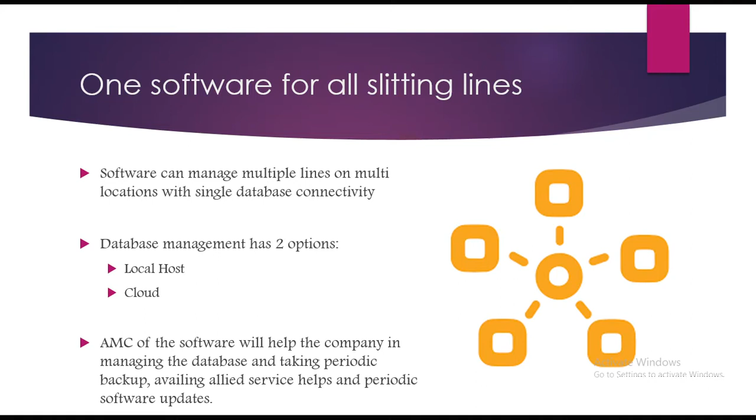So I'll come to the first point of this software that we elaborated earlier: one software for all the slitting lines. As I told, we can have 2 or 3 different geographical locations of the plant, and we can manage them through a single window. That is a very good and versatile function of this software, and nobody in the world is offering that type of flexibility.

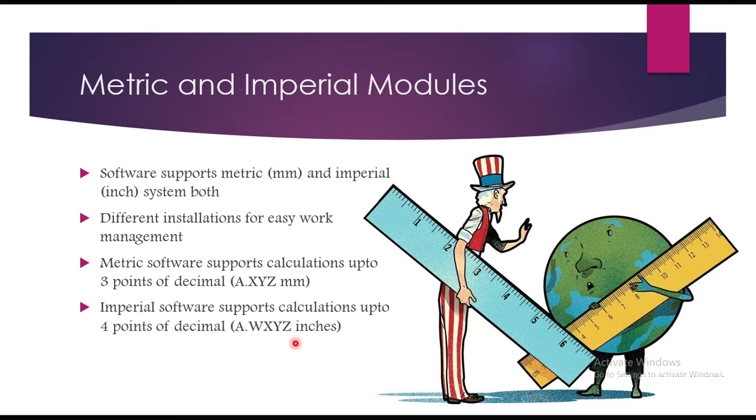So this single software works on both metric and inches. As I told, the metric software works to 3 decimal places maximum, and for inches it supports up to 4 decimal places. So we can manage multiple slitting lines, either metric or inches, through this software.

Other than this, the software does not only focus on the slitter; it also focuses on the overarm separator. So we can do both overarm separator management and slitter management. Some slitting lines have removable heads, some have injectable heads, some have turret heads, so it can manage different types of heads. We can print reports, reverse, forward, plenty of things demanded by the end users. So we can offer seamless, infinite variability to the customer as per their requirements.

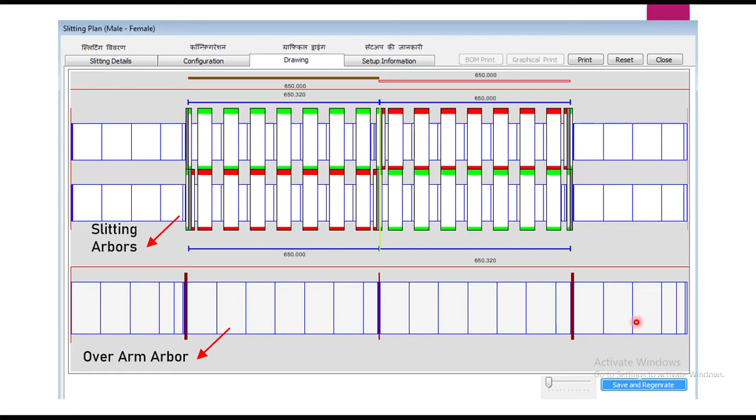The white ones are the spacers, metallic spacers. These colored spacers are the rubber bonded spacers. So these two are the slitting line arbors, top arbor and bottom arbor. And similarly, this on the bottom side is the overarm separator arbor. So it is showing the setup in the form of a drawing.

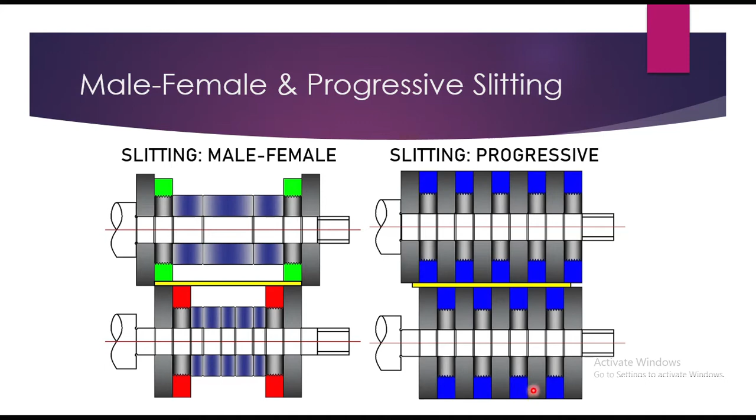This is a practical example of a male and female slitter. If you see, the bottom spacers are there, bottom arbor, top arbor. We are doing this slitting, and this is a pre-assembled arbor which is used in progressive slitting, so that can also be managed through this software.

Many of the lines work on shims, plastic shims. So we can use this software to manage plastic shims, while some lines are shimless and use fraction metallic spacers. So we can put fraction metallic spacers into the inventory. We can allow the user to input plastic shims, and as I told, there is no limitation on the software when we use it in the workshop.

So it is very versatile, and it gives absolute flexibility to the user to use the software for any sort of line. So repeatedly I am telling you that it is not just a software to manage shimless tools; lines which are using shims we can also manage through this software. Yes, we should admit that the software has plenty of functions and features specifically targeting shimless tooling, because when we developed this software earlier, we were targeting only shimless, so we were calling it shimless tooling management software.

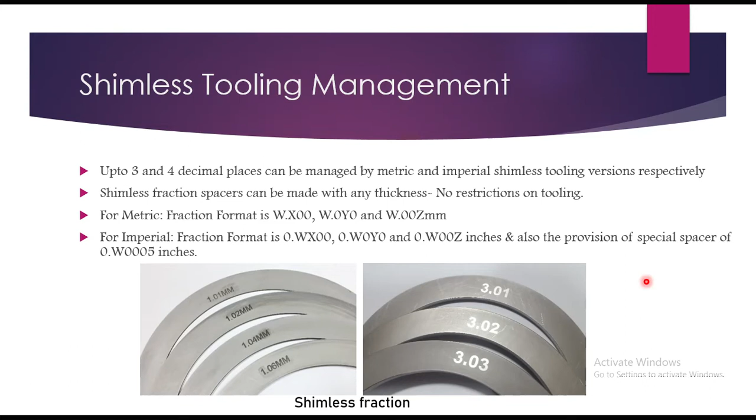And if you want to bring a systematic culture into your company, the software helps the management to do so.

So as I was telling you, in this software, when we set up any machine, it allows us to select whether that machine works shimless or with shims, and what decimal system we are working on, whether we are using the slitting line for first decimal, second decimal, or third decimal. So up to whatever accuracy the line is built, to that accuracy we can use the software.

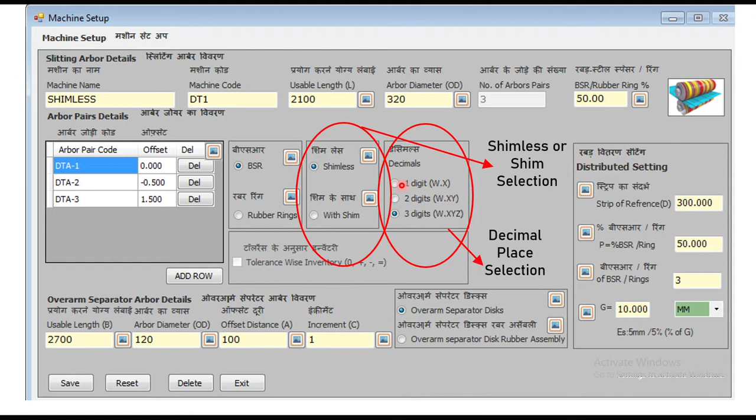When we select any sort of decimal system, it allows us to input the inventory of that particular line. For that particular line, we can input the inventory of the metallic spacers, like all the tools that we will be using for slitting. So all the tools can be input through the software.

This particular job we do when we set up the software for the customer: we take all the inventory from the customer, and we do this data entry into the software, because this is not a day-to-day job they need to do. So when the software is installed for the user, they just do the setups. They make the setup, take the printout, and do the slitting. So they don't need to do any of this inventory filling of forms and other things.

But these are the provisions that are there. We can alter if there is any damage in any size, or there is addition or subtraction of the actual quantity; we can come here onto these screens and do the alterations. So, as I told, not only the shimless, we can do the plastic shims as well. So these plastic shims also we can input into the software.

When we use plastic shims, why it is not desirable to have them in the setup is because the compressibility of the plastic shims is a major issue. When we have these plastic shims in the slitting line between the spacers, and when we tighten the lock nuts, or hydraulic lock nuts, or grease lock nuts, or hydraulic locking, any of the locking systems, when we apply this clamping force,

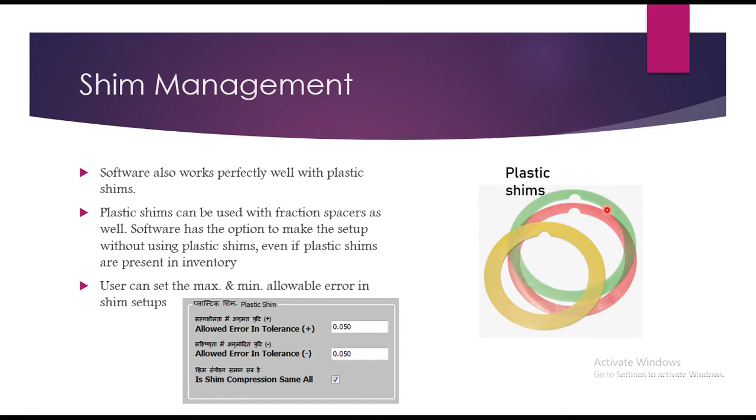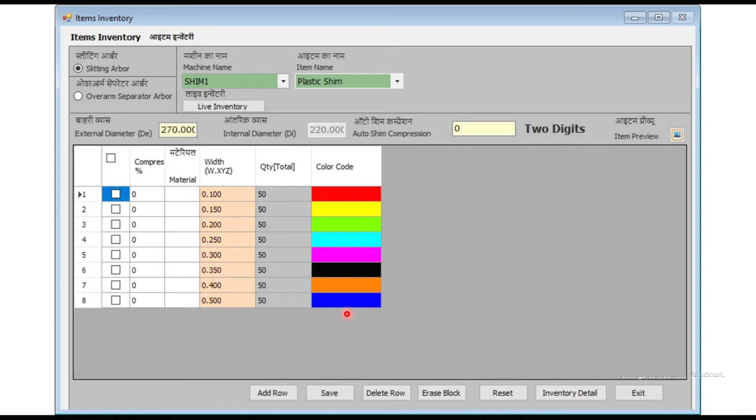Of course, we need a color printout of the report so that the color can appear, but on the soft copy it will be appearing if you don't have a color printout on the line.

For plastic shims, when we developed this software and did some demos, some customers asked why it uses plastic all the time, if I have a machine with metal spacers as well as plastic shims. Earlier, my software was trying to make every setup using metal and plastic shims all the time. But there is plenty of possibility that I have some metallic fraction spacers with which, for example, I can make 80% of the setup, and for the remaining 20% I want to use plastic shims.

So one line I want to manage with plastic shims, but 80% of my jobs or setups I want to do through metallic spacers only. So we have introduced this check button. If we check this particular button, only then plastic shims will be used in the particular setup. If we uncheck this option, the setup will not use plastic shims for the calculation; it will do the calculation with metallic spacers.

So even if plastic shims are available in the inventory, it tries to make the setup with metallic spacers, and by doing so we reduce the possibility of error during the setup. So this is also one unique feature.

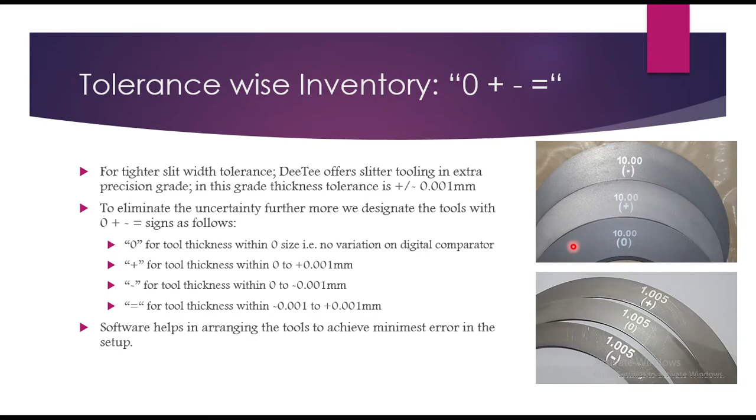But if we manufacture this type of tooling for any customer who wants to use this function, we can supply the tools with these marks, and our software will have this provision; we will enable the tolerance-wise inventory function. For example, for knives, we can input the 0 tolerance quantity, the plus tolerance quantity and the minus tolerance quantity in the software.

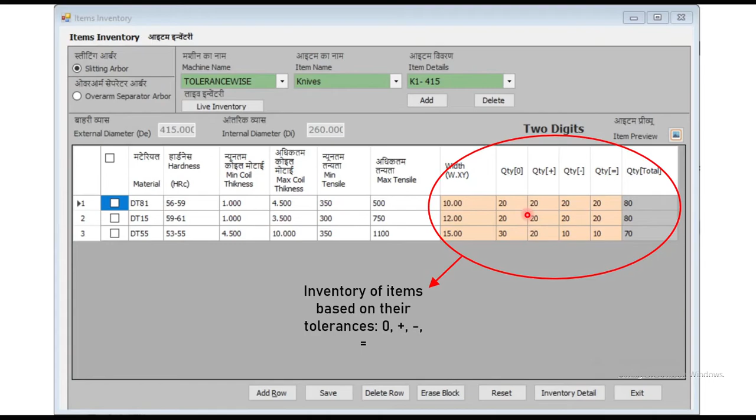So like that, when we are doing it at the end of the top and bottom arbor, it will do the sum. How many plus tolerance jobs I have used: 20, minus 20, 0 61, equal tolerance. How many pieces I have used: 3. So the cumulative tolerance, cumulative error, because of the thickness of the job, is only plus 3 microns, and here in this case on the bottom arbor it is plus 10 microns.

But if we don't mark plus, minus or 0, we will be using the spacers randomly and the tolerance will not be known. So this particular requirement we can fulfill, and this particular function can be used particularly by the CR slitters who are really looking for close tolerances.

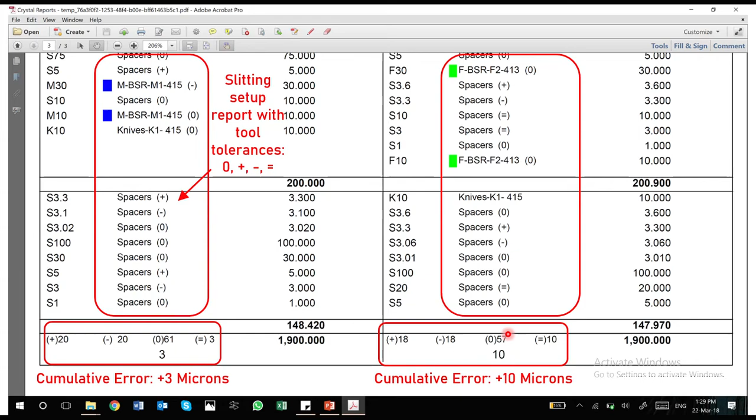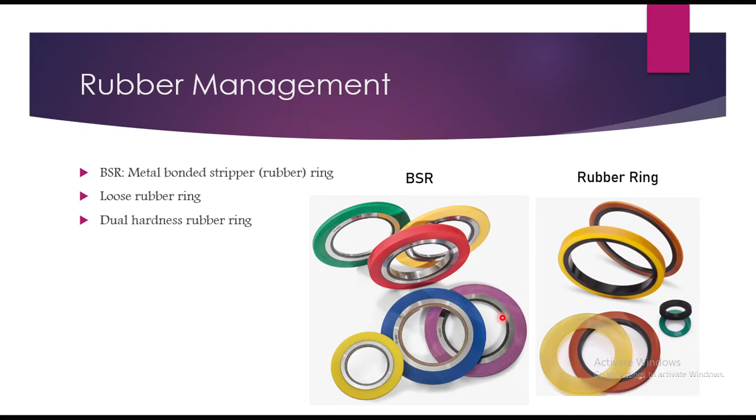Okay. Now, regarding rubber management, our software gives very good flexibility to the user whether they want to use a rubberized spacer, metal bonded rubberized spacer, loose rubber rings, or dual hardness rubber rings. So any requirement of the customer can be managed through this software. When we make a setup, we can select for any particular side whether we want to use rubber bonded spacers or rubber rings.

Okay. So when we set up this software, in the inventory screen we can define different types of colors and diameters of the jobs. Using the software we can define in the inventory if the customer has certain sets of male and female rubber bonded spacers or rubber rings. So we can define female rubber bonded spacers, like here male rubber rings. So any of the inventory we can manage through the software. We'll see it a little later on the actual software as well.

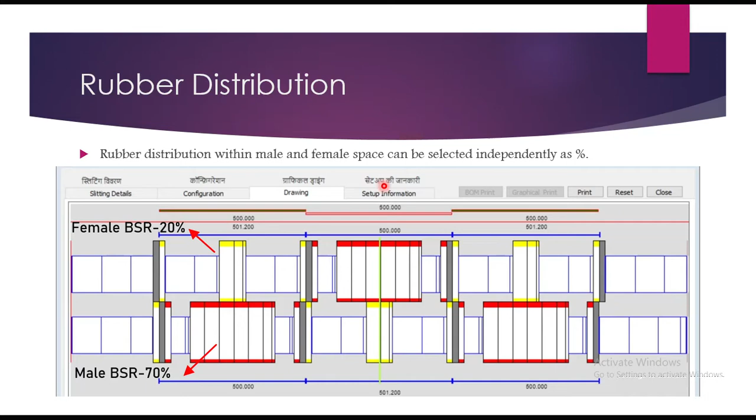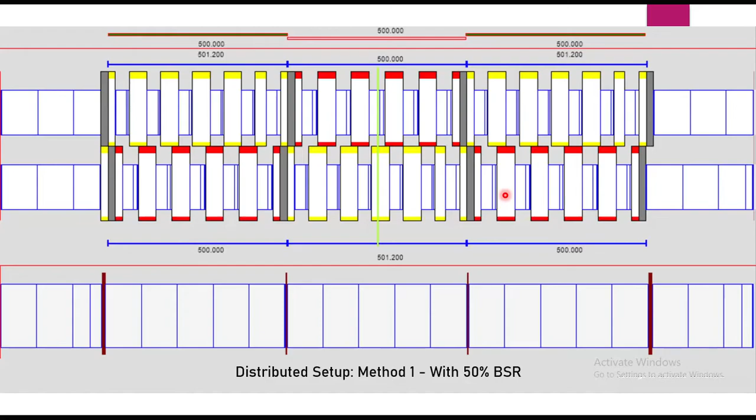Rubber rings had one hurdle when managing through the software. When we use 20 rubber bonded spacers, they occupy 20 of space on the arbor, but for the rubber ring it is not the case. A rubber ring does not occupy any space on the arbor while filling the arbor, because rubber rings are mounted over the spacer metal OD. So it was a little difficult for us to do the management using this software. So we have introduced this ring mapping.

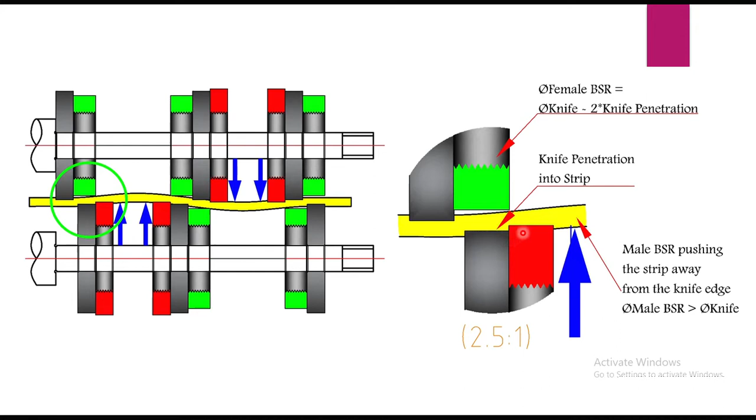This allows us not to have a mark on the cut strip equal to this thickness. For example, if it is 15 on the slit, if we see exactly at 15 there is one line that we get on the slit, this strip width - that is called slit-in. This can be avoided by proper use of male rubber bonded spacers, as shown here, generating this gap.

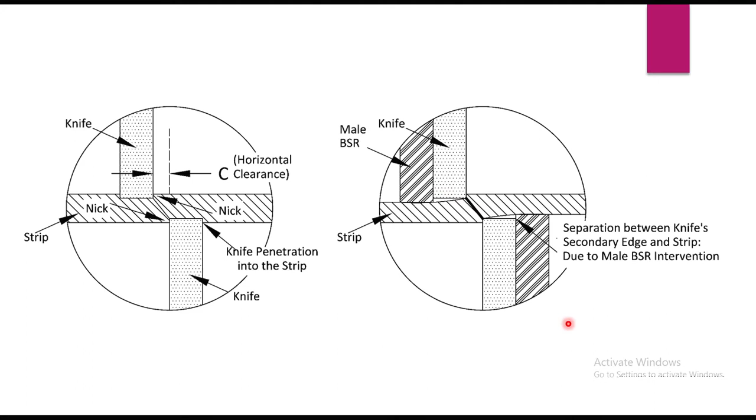So these types of things also can be done using our software, which covers rubber bonded spacer practices that customers have. There are plenty of scientific ways of doing this calculation, how much should be the diameter of the rubberized spacers, and those things also we can do using this software.

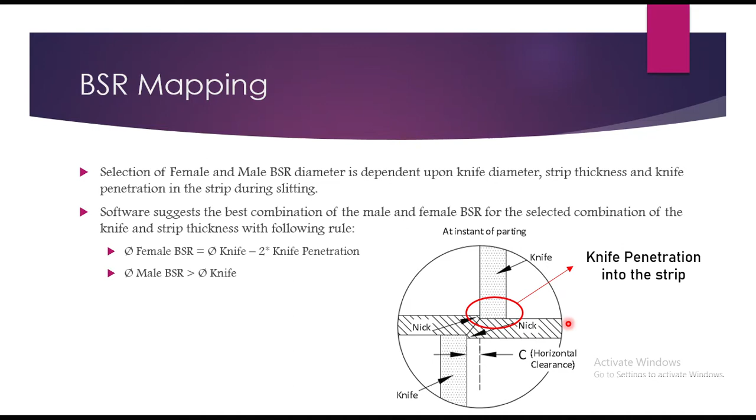There is one important part, this BSR mapping is there. We will show this part when we will be doing through the actual software, which will be a little clearer to you at that time. I'll skip this session a little bit.

There is one more important point which is a very key function for selling this software to the customer: application mapping for the knife. As explained in the previous session, one knife cannot cut all materials. When a customer asks us to design a knife, we design it for its application, and that application is not marked on the knife. So the end user will not know which particular knife is designed for which application. It is on paper, but all the technical detail cannot be written on the knife face.

So what is the scenario? Okay, I'll try to be a little slow on the pace as I'm getting constant reminders. Okay, we are talking about this application mapping for the knife.

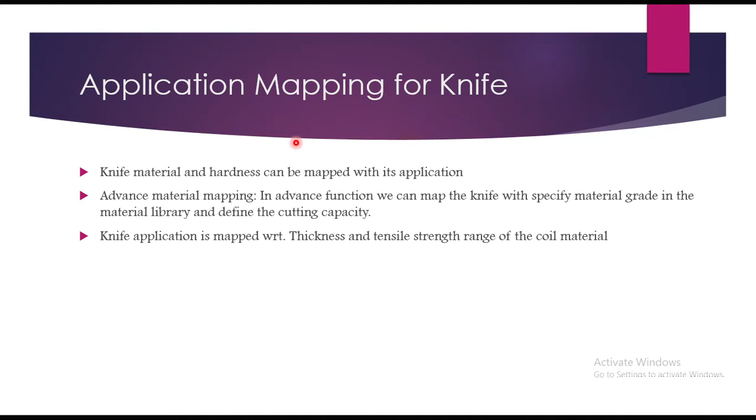But if you want to map the application into the software, whatever the cutting capacity is, we can define it into the software. So if it is already defined, and you are dependent on this software to make the setup, then if we use a 10mm knife that is designed for 1mm to 4mm, and try to select it for slitting 5mm, the software will not allow it, because we will be mapping the particular knife to its application.

So any mishandling of the job by using a knife for an inappropriate application can be avoided using this software. This is a degree of security we can sell to the user: this type of flexibility means failures due to application mismatch during day-to-day usage can be avoided. But of course you need to be dependent on the software to do it, because if they make the setup without using the software, nobody can help. So if the customer is dependent on this software to make the setup, the software will not allow them to use the knife other than for its intended application.

I am skipping this particular alternate knife selection function a bit. This is also one function: if any knife gets exhausted during setup, meaning its quantity is not sufficient, the software intelligently selects alternate knives as well, based on its application mapping, without sacrificing cut quality. So this alternate knife selection can also be used in the software.

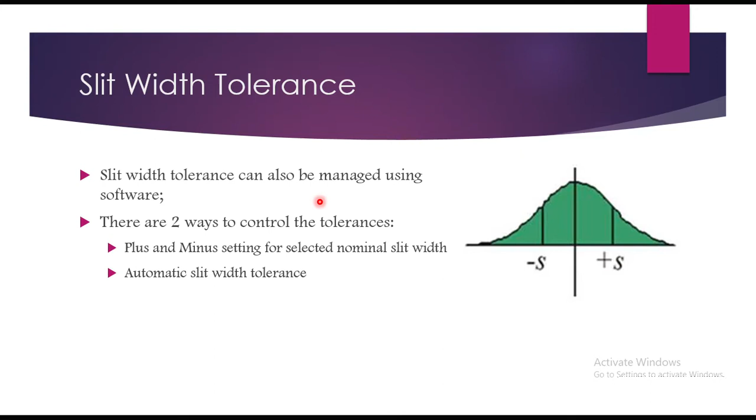One more important function of this software is it allows the user to control the slit width tolerance as well. There are two versions or calculation levels for slit width tolerance calculation. One of the very common ways of controlling the tolerance of the slit width is the plus and minus setting.

In the software, the first level calculation allows this plus and minus setting, which I will show in the actual software. If we select the plus setting, whatever slit we generate, its tolerance will always be positive, never negative. If we use the minus setting, the tolerance of the slit we cut will never be plus, it will always be minus. So this is the very basic setup that we can do.

There is one advanced slit width tolerance feature also we can do. For example, if we want to cut 200 mm width with 8 number of slits, this is a very impractical example, but just to show you the versatility of the software. For each slit I want different tolerance: 0.1 to 0.5, minus 0.1 to 0.2, 0 to 0.3, 0 to 0.25, 0 to 0.2, minus 0.3 to 0, minus 0.25 to 0, minus 0.2 to 0. This is actually filled by the user. So I want to have 200 mm width, but I also want this much tolerance on the width.

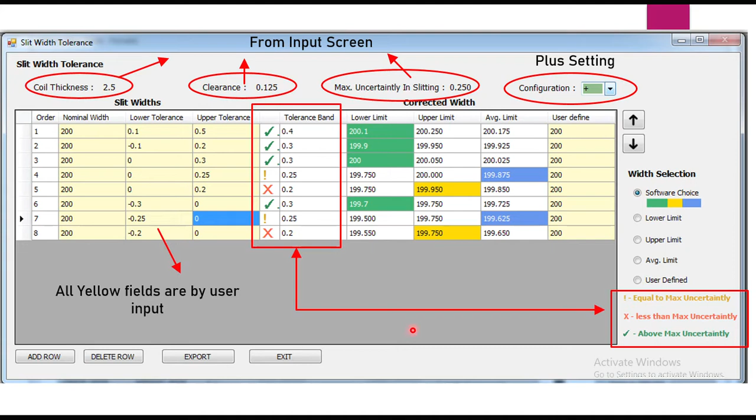So what my software does, it calculates what should be the actual width. Earlier, if I don't use slit width tolerance, I would have used 200 eight times, but I have used that tolerance window, so then it intelligently selected my nominal size. I am not saying it is bang on perfect, but it is calculating based on some mathematical logic how you need to select your nominal size to achieve that particular tolerance. So software also assists us, it is not just input and output, it also tells you many things.

By using this software, we can do regrinding management of the tools as well. This is also a very good feature, not offered by any of the competitor software. So this regrinding management also we can do. We can actually...

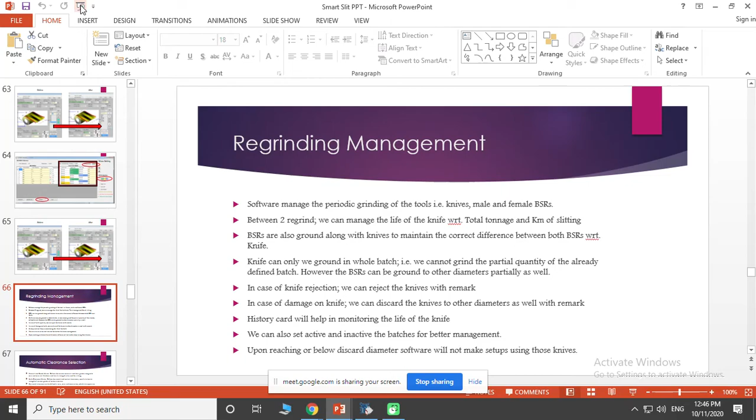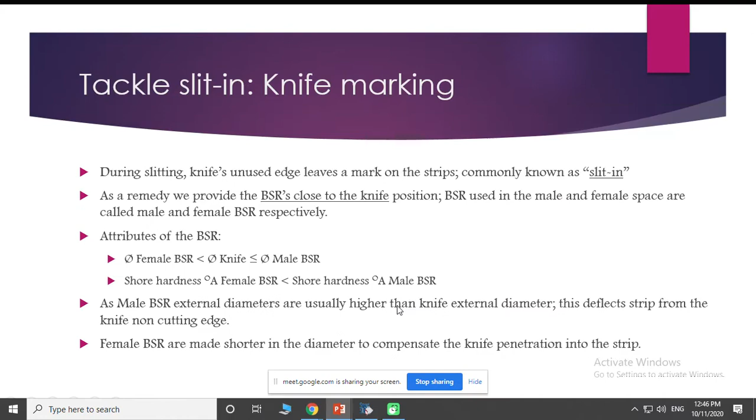Hello, just a minute. Hello, Prabhaji. Why is it not coming for so long? Hello, hello, is it audible sir? Just a minute. Sir, am I audible? Okay, okay, let me present the screen one more time. Okay, Prabhat sir, can you let me know from where I have... just a minute. I think I was on regrinding. Okay, I hope I have covered the slit width tolerance. It was covered. Okay.

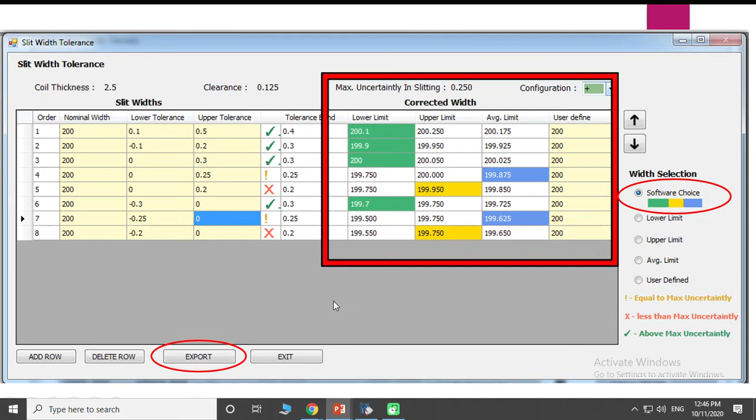So this particular software also, when customer wants to use dynamic tolerances for various strip widths, that can also be tackled through software, but it is not 100% correct, because nobody can predict 100% what tolerance the slit will come out to after slitting. It is not very easy to predict, but I could guarantee it can give you a very fair idea up to what level you can achieve. Software doesn't tell you that you can 100% achieve that tolerance. Theoretically, when it calculates the possibility, it calculates whether you are able to generate that tolerance or not.

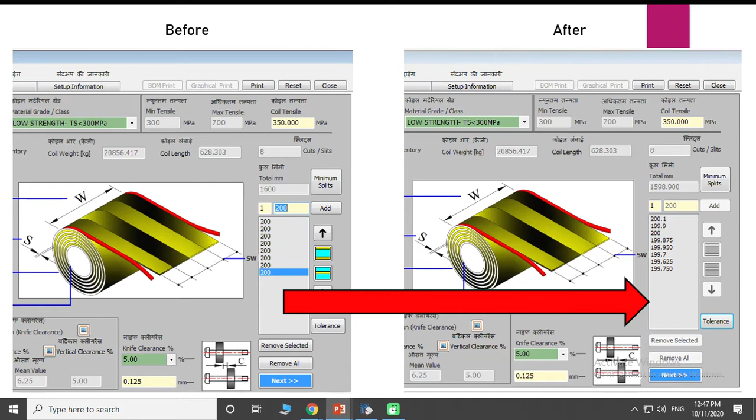So plenty of things are there, but scientifically we can have that initial information regarding how to do it. Now, one of the very important parts of this software is regrinding management. No software of the competitors is offering this regrinding management. When the knife gets blunt, we send it for regrinding, and after regrinding we get a new diameter. So whatever diameter reduction we have, for example 1 mm diameter has been ground, we calculate with the previous diameter how much tonnage or how much kilometer of slitting we have done. This software generates a history card for the complete life cycle of the knife, and tells the user how much per grinding, how much tonnage or kilometer they are slitting.

That is also a very good indicator. All slitter users have the practice to calculate this tonnage or kilometers, but this is the one software which is actually doing it automatically, of course you need to do the regrinding management through the software only, then it will tell you. This is also a unique function that will help the user, and we are extending one more possibility into the software.

Another important part is automatic clearance selection. Again, software is not just generating output from whatever input you provide, it also suggests the clearances, what should be the optimum clearance you should use. Of course, it is based on some table, nothing is automatic. We provide some tables into the software, so when you select the material class and thickness, based on the predefined chart, it tells you what clearance you should use, and it is fairly customizable.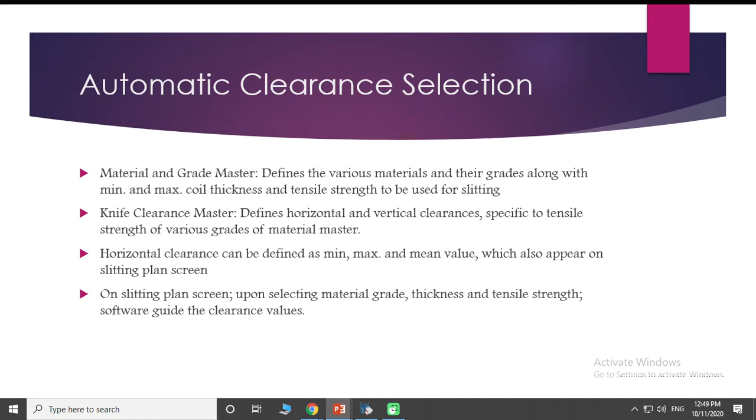We will see it on the actual software, but this is also a pretty good area in which it helps us, and the software is not only input-output software. So we'll see it there on the actual screens also, how it does.

And I told you that this software helps in data archiving, historical data. We can always search whatever past setups we have made, and any setup we want to recreate, like last month we generated that setup and we want to generate the same setup one more time. So we don't need to do any data entry, since that setup is already there. We just need to note down the number.

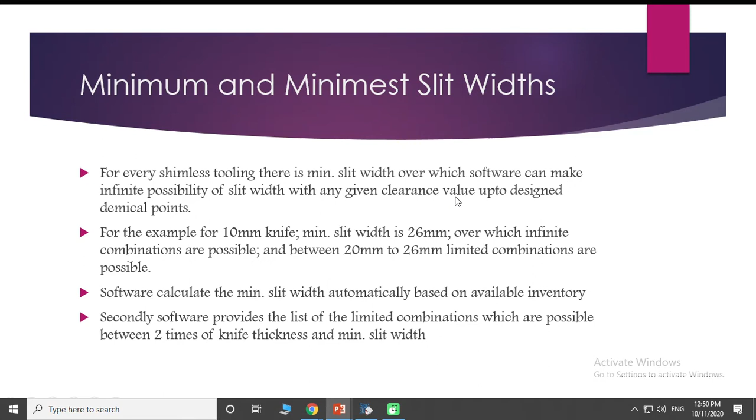That setup number we used in that particular past, or even if you don't remember it, we can always relook and generate the setup. So it is a very fast way of doing it. There are endless things we have introduced into the software. I cannot tell you everything in just one session. Just a small glimpse.

Just for example, if we are using a 10 mm knife, the minimum slit we can take is 20. When we design a tool based on the inventory, we tell the customer what the minimum slit width is. Minimum slit width is 20. Why 20? 10 mm knife into 2, it is 20. So the minimum slit width we can take with a 10 mm knife is 20, no doubt about it.

But when the customer has different spacers, various fractions of spacers, based on that my software calculates what minimum slit width we should commit to the customer, above which he can make infinite variable slit widths. Any slitting he wants to do above that width, he can do.

So for any sort of random inventory, my software tells, for that particular line, for a 10 mm knife, minimum slit width is 20, no doubt about it. Minimum spacing 6 mm I want for the particular inventory, so it says 26. So above 26 I will be able to make any sort of setup. But between 20 and 26, I can make only a limited number of combinations.

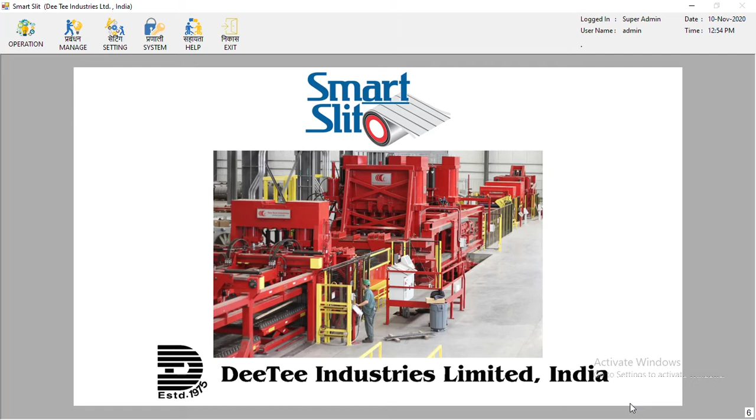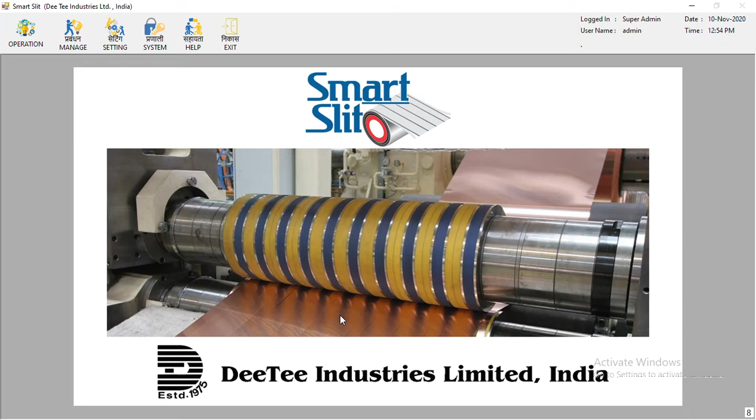So that rights management is there, which screen they can do what on. Some predefined rights are there. If you want to add or subtract rights, that we can also do. Right now I am logged in as super admin. We provide one login for any person, so he can make several admins and several users. That is up to them.

In this particular software, different languages are there.

So different languages can be supported. So what my software does is, these English captions are always there on the software. Okay, so no matter which language you select, English captions are the default captions, and above that, whatever secondary language you select, that caption will appear.

Okay, so that will also help us at the customer site, if we are managing the software from a distance or we are physically there, and we don't understand their language and they don't understand our language. So English would be the default conversation language for the software, and for the secondary language we can select any of the languages which are there on the software. So various languages are there.

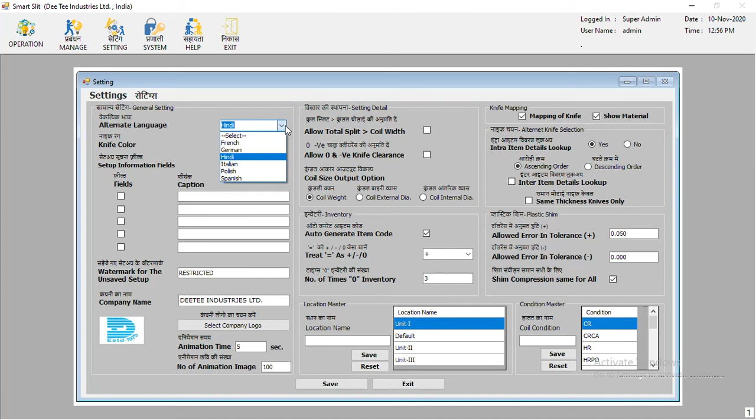We are providing some captions which we translate, and the software uses those captions to translate. And plenty of languages we can also add. If some language is not there, you don't need to be disheartened. It is very flexible, since we are the manufacturer and developer of the software. We can have any language, and we can incorporate it within one day.

So let's go right to the matters we discussed. Okay, I'll start the software by introducing two important parameters. The software comes with a pre-default library, the material and grade master. So there are different types of material that we have provided here. Like for low carbon, this is the steel grade, and this is the steel type, the basic broad area of the steel, and on this screen the various grades that you will be using are listed. And here some coil conditions are also in the software.

So for any customer, this library has to be updated. If they have their own inventory, they deal in certain grades. They don't want universal grades to be displayed in the software, and we need to be a little cautious, because this software will be used by the user. So we need to use those terms which the user is friendly with.

Like, we have done some installation in the USA, at Outokumpu. What they told us, they are making more than 50,000 grades in stainless steel. They said my customer and my user understand type A, type B, type C, type D of SS. So what they asked us to do: for type A, mention these grades, the major grades that we will be slitting. In type B, mention these grades. Type C, these grades. So based on this, customization can also be done. Certain grades can be planned into the software. So this is editable.

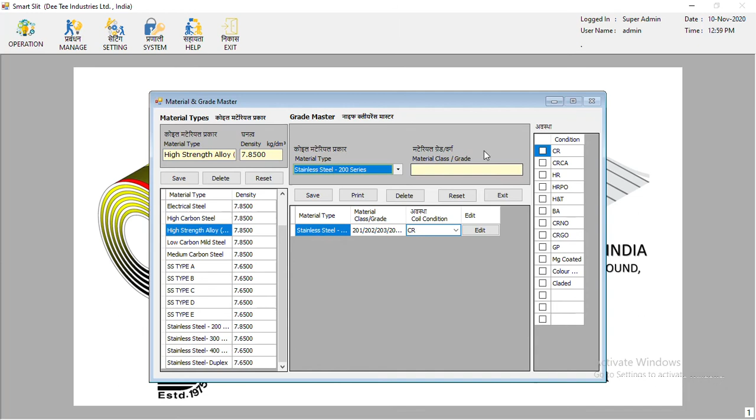So based on the material and grade master, there is also one more library, for knife clearance, horizontal clearance. There is a predefined library for that too. One is the coil tensile strength based table. One is the coil thickness based table. Again, it is based on customer requirement only.

Some customers want to have that type of table. Just for example, I select low carbon steel. For low carbon steel, my user was telling me, my practice is up to 300 tensile strength, I use 5 to 7.5% clearance. Between the range 300 to 500, I am using 6 to 8%, and 500 and above, I am using 7.5 to 10%. So like that the customer was demanding.

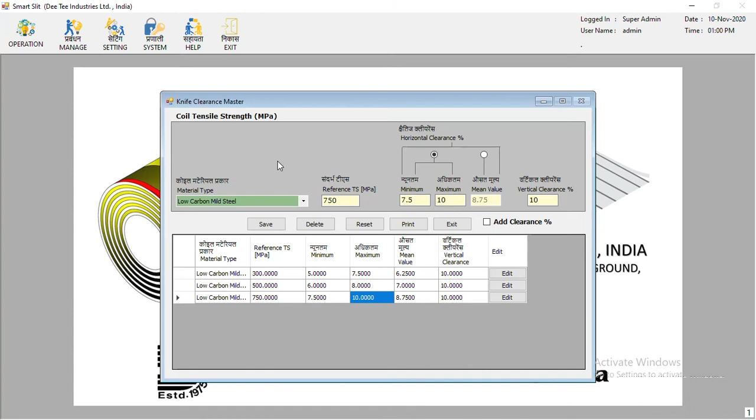So this clearance selection will be based on the tensile strength of the coil. If we select this knife clearance master, if we select coil thickness, what will happen? This is low carbon steel. Sorry, I think I input here. So again, this particular customization we had to do for Outokumpu.

They requested us: for this type A material, for 0.3 we use 13% clearance. For 0.4 mm thickness, the tensile strength is not appearing. Based on the strip thickness, they are deciding the clearance. In the previous chart, based on tensile strength, we were selecting the clearance as a percentage of thickness. But here, when they vary the thickness, they also want to vary the clearance. For 0.3 they use 13%, but for 2.5 they want to use 16%.

So these types of specific customization we have also provided them, and now we have made this function a standard. So this also has two types of selection.

Now, when we set up these machines for the user, in this demo software I have made 10 different machines, just for example, DT shimless. The customer does not need to do anything with this screen, because this is a one-time job that we do. The customer does not need to do any of the settings here.

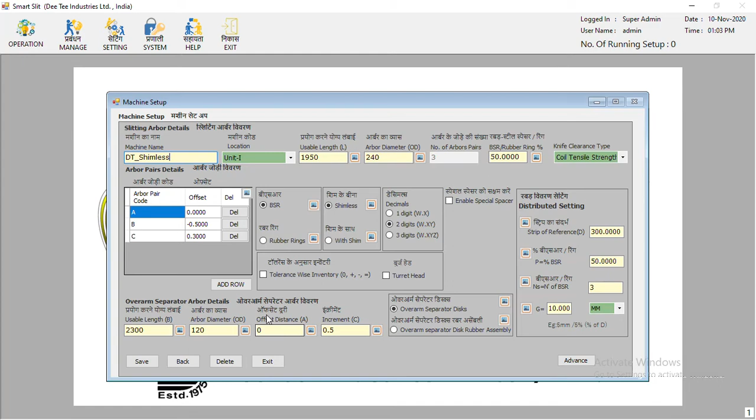A line can have plenty of arbors; this slitter can have 3, 4 or 5 pairs of arbors, and those can be defined. I can select rubber bonded spacers, rubber rings, shimless or shim, or decimal system. Likewise we can define overarm separator details. These settings we do one time. So we can have plenty of different machines in our plant, and different locations as well.

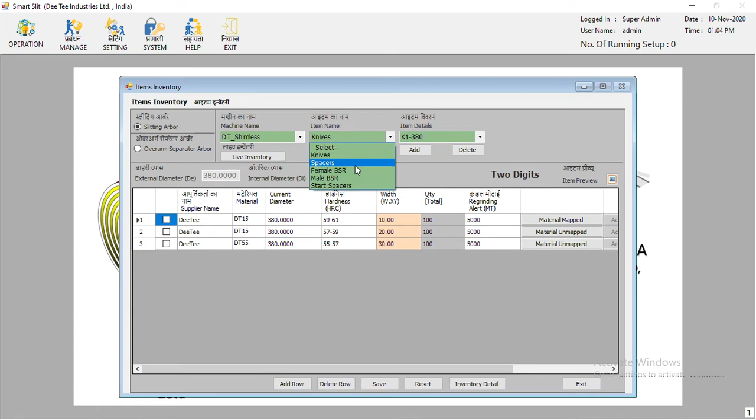After that, again as part of our duty, based on different lines there is different inventory, so we make the inventory of the knives in the software. Knives, spacers, rubber bonded spacers; these are the female rubber bonded spacers, like 379 diameter. The knife diameter is 380, not 400. The first rubber bonded spacer is red, diameter 379. Then 378 is green.

You can see the colors on the right hand side. 377 is yellow. The male rubberized spacer is 380.5, blue in color. Whatever colors the customer uses can be customized here, and this inventory as male and female we can input. Again, it is a one-time job. Right from the start of the software, these things are filled by us, not by the user.

Now, the user only has to work with this screen operation. He clicks on slitting plan, male and female, and this screen opens. The beauty of this screen is that it remembers whatever settings you have done previously. If you accidentally exit this screen, it first asks, do you really want to exit? Even if we say okay, when we open this screen again, it remembers all the past settings we input.

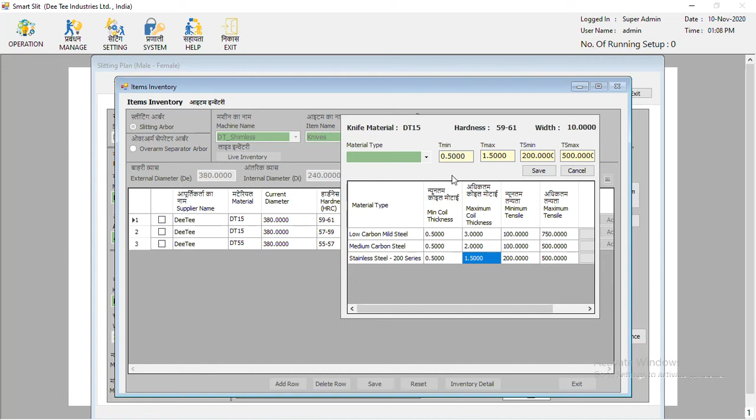Then on medium carbon steel I can use 0.5 to 2 mm, and similarly for stainless steel 0.5 to 1.5 mm, and this is the tensile strength range. So this is the mapping of the knife to application. This is called knife application mapping, and this type of mapping we have not provided to 20 and 30 mm. So what is its effect on this particular screen, we see.

So we select this particular 10 mm knife. It is showing me thickness, hardness, current diameter, and it is not allowing me to select all materials. So first of all, I am not able to make any setup other than these three materials. Now I select low carbon steel. I input the coil width on this photo. This is the input coil width.

For the example, let's say I input 1800. Coil thickness, for the example, I take 1 mm. External diameter of the coil, let's say it is 2000. Coil internal diameter is 500. Why is internal diameter of the coil required? Because with these three things we will be able to calculate the coil weight and coil length. So for the example, 500 mm slitting I want to make, 3 slits I want to take.

So what I was telling you, if I select 1 mm, for low carbon steel, this is the application. Minimum thickness 0.5 I can slit, and 3 mm maximum. When I select nothing, it does not show anything here. When I select low carbon, it shows 0.5 to 3 mm. When I select medium carbon, it shows 0.5 to 2.

Simultaneously it is also showing tensile strength at the right hand side here, where you are inputting coil tensile strength, so that is also varying. For stainless steel, 0.5 to 1.5 I can slit, and 200 to 500 I can do. If I select 1 mm and press next, it goes to the next screen, because it is allowing 0.5 to 1.5. For the example, I put 2 mm and try to press next. What is happening? It is saying warning, entered thickness is not suitable for knife.

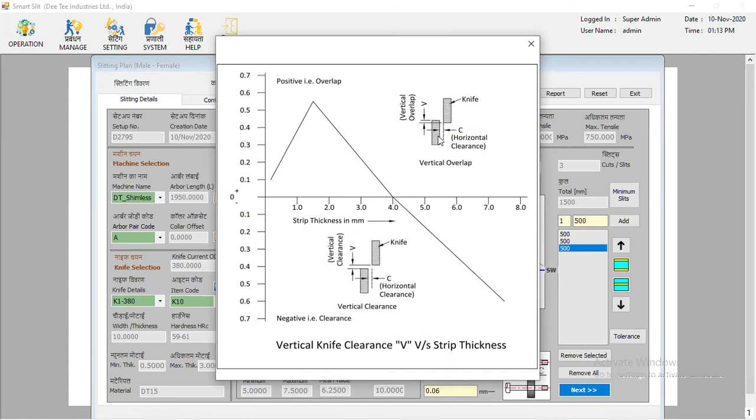Now the second thing. By default, this automatic clearance is dependent on the coil tensile strength. If I do it here 100, if you see these figures, horizontal clearance, these figures will give you some guideline. Vertical clearance, vertical overlap, recommended knife condition also. These photographs we also incorporated in our previous session. So these show the user a little information.

So if I am changing my clearance, like it is 100 here, you can see 5, 7.5 and 6.25, which is minimum, maximum and average horizontal clearance. If I change this value to 500, these values are changing. This is dynamic. This is 600. For 500 it is different. For 1000 it is different. So for different material it would be based on how you have selected the clearance master, and based on that, it will suggest you some clearance.

So again, it is dynamic, and we can select a certain percentage if you want a specific percentage. Other than that, if you want to say, I want to use this clearance, these things we can do. This screen helps us in providing various widths like 100, 200, 300, 400, 500, 600. Above that it is not allowing, because if I add 500 to 600, it will exceed my coil width, so it is not allowing me to input. So I'll put 300. I make it 250.

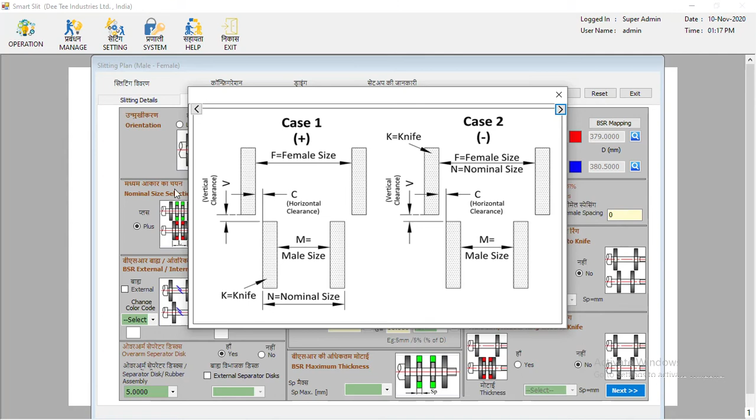Other than that, as shown in the previous slide, I can do plus nominal size selection using plus or minus setting. If I use plus setting, my slit width tolerance will always be positive - that is case 1. If I select minus setting, then my slit width tolerance will always be minus.

So what I mean, if I press plus here, if I press next, so this is this space to this space. Let me select a little more wider knife, so it will be a little different. I need to select material. This is a little wider with 20 mm knives.

In this 500 mm is what I write. Let's take some of this - 300, 400, 500. My horizontal clearance is 0.06 here. So this is 300, this is 400, and this is 500.

So my first 300 will cut from here. Second size was 400, so my 400 will cut here. Always the size is cutting from the male side. So 300 is here, 400 is here, 500 is here. That's how the setup happens - we call it male female setup.

On the female side, if you see, it is 300, so it becomes 300.12. Whatever the clearance was there, 0.06 into 2 becomes 0.12. So in the drawing, if you see, 300.12 is here, 400.12 here, and 500.12 here.

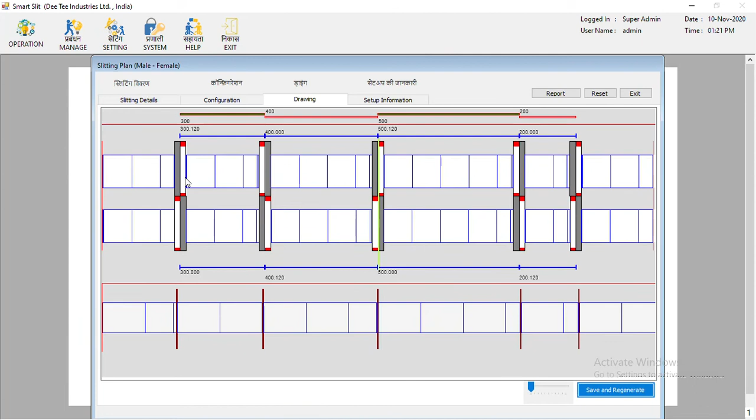Now if I press yes here, which is a female rubberized spacer option, what happens is it will use this female rubberized spacer in the female rubber spacer positions. Again, this is demanded by the customer based on their practices.

If I make male rubberized spacer yes, then it will add male rubber spacers as well into the setup, but in between no rubber spacer is filled - only near the knife rubber spacers have been used. There's one more setup, that is block setup. If I want to fill 50% of the space with rubberized spacer, it will fill the metal and rubber spacer space with a rubberized spacer, up to 50% of space.

If I want to distribute these spacers, so they're not close to one another, I can distribute them. This is also a desirable setup customers want to use. So these things the software automatically does.

And based on any sort of calculation. Okay, up to now we are just doing some random calculations. We are not serious in giving these setups to the user yet.

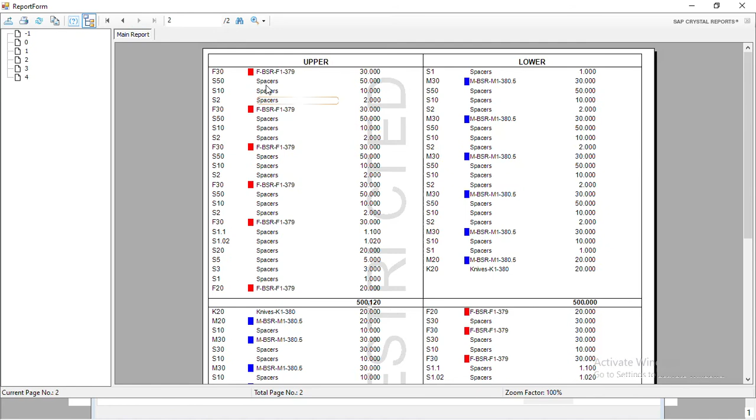Here, one caution is shown: do not print or use this for slitting setup. Why is it showing this alarm? Because we are just viewing a different type of setup, we don't want to do the actual setting right now.

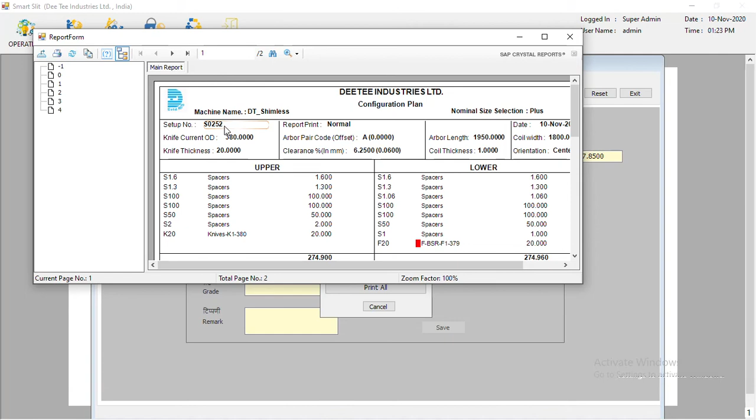So if you want to do the actual setting, we need to save this setup. When we do the saving, we can put the produce order number, client name, grade, and some other miscellaneous operations, more fields we can incorporate into this. When we save, this particular number gets changed.

Earlier it was showing something else, now it is saved setup, so it is permanently saved into the environment. No alarms are there, and we can print this report and give it to the operator, and this particular report will be saved into our library also. So this is the slitter printout, this is the overarm printout.

Okay, there is one more beautiful graphical report it generates like this. That also can be given to the operator.

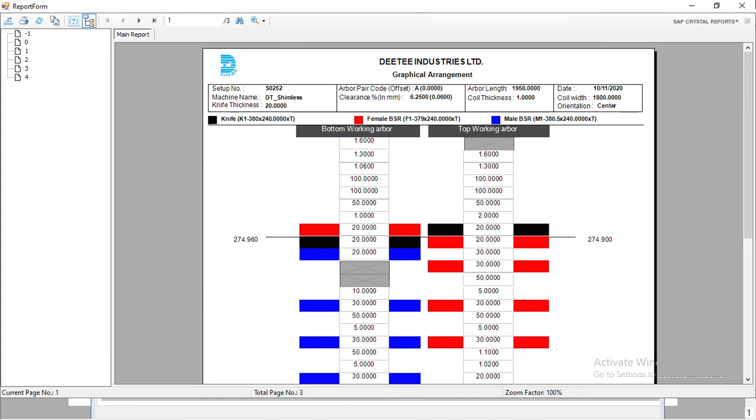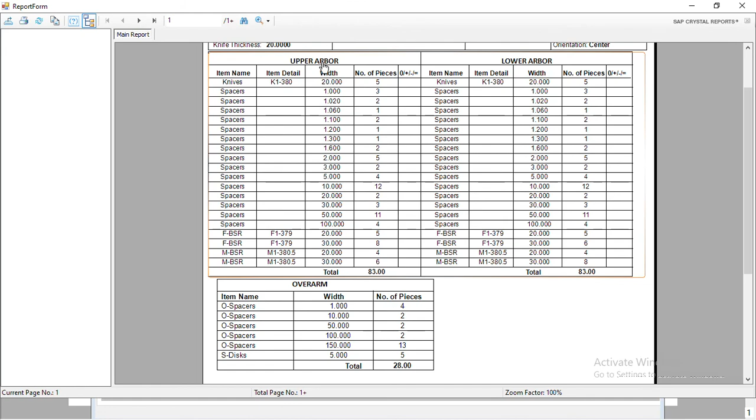So plenty of reportings are there. We can have a bill of material, showing how much total inventory is required for this particular setup, for top arbor, for lower arbor, for overarm. That is also there.

Some setup information also it gives, like how much width we have used, what percentage of total coil we have used. So 77.78% of coil width we have used, and 22.22% has been wasted. All these things it records and also gives you a printout of it.

Now, what happens in this inventory: when we save any setup, or when we see the live inventory, saving a setup reduces the live inventory. Like I have used 20 knife thickness, so now 90 it is showing. Available was 100, but 90 it is showing. Why is it showing 90? Because these particular knives are actually engaged on the arbor.

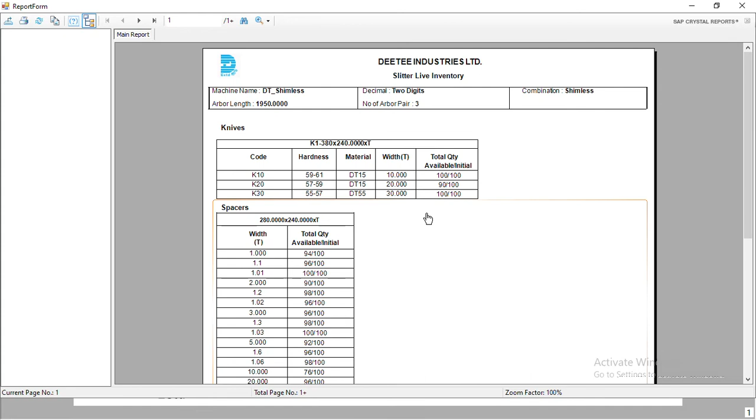So live inventory also reduces. Actual inventory it is also showing, live inventory also it is showing. If I make another setup, these are the different inventories. What is actual, and what is being used?

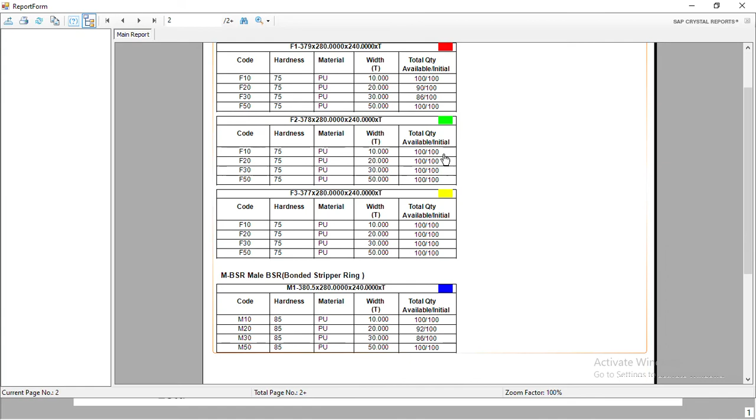So now, if I go to this setup again and select that particular machine, it remembers all the settings we have done in the past. The number of running setups showing is 1. If I make one more setup, like 500, and go here and save another setup, then exit and go again onto this, it will show number of running setups as 2.

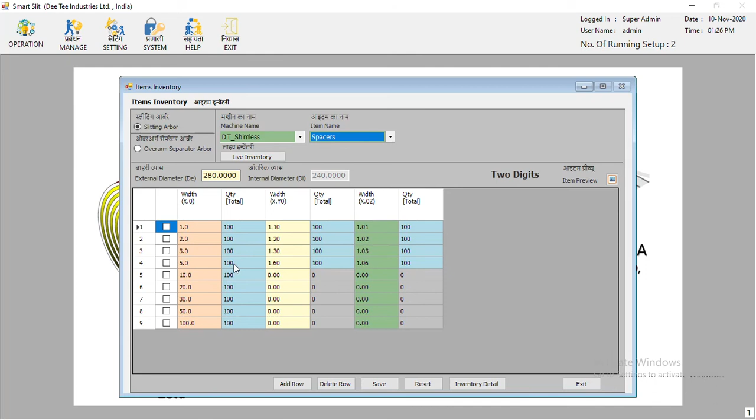Now if we see the inventory from the inventory screen also, whatever spacers it is using, it changes colors. Whatever blue colors are there, those quantities and other things we cannot change, and these are all used by the setup at the moment.

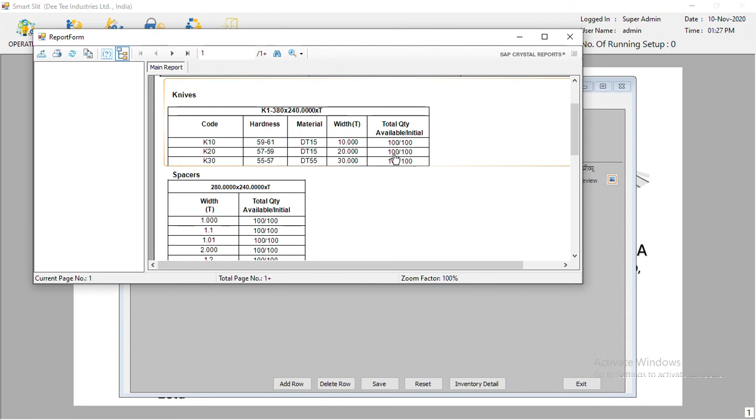Once the setup is finished by the user, all the inventories are returned. So I can go to this screen and actually return the setups. If I check the inventory again, previously for 20 it was showing 90 or 86 something, now it is showing 100. So all the inventory has been returned and the setup is available. So if you have sufficient inventory with you, you don't need to save the setup.

Unsave setup also saves to the database, but it's better to use the saving function. So these are the only screens this operator has to use - just these 4 screens. Although it's a massive software with many functions, it's very simple because the operator is concerned with a single window only. So the software is bulky, no doubt, but very user friendly, and an operator would be really delighted to use it.

Okay, I've shown you one more important function. Some of the lines usually have a turret head. What is a turret head? I'll show you. Just a minute.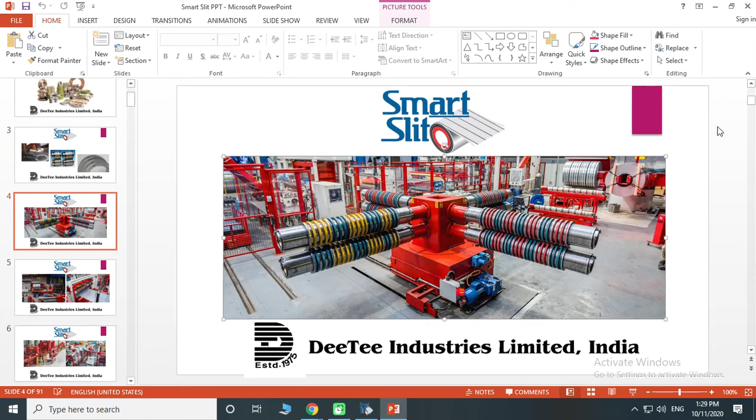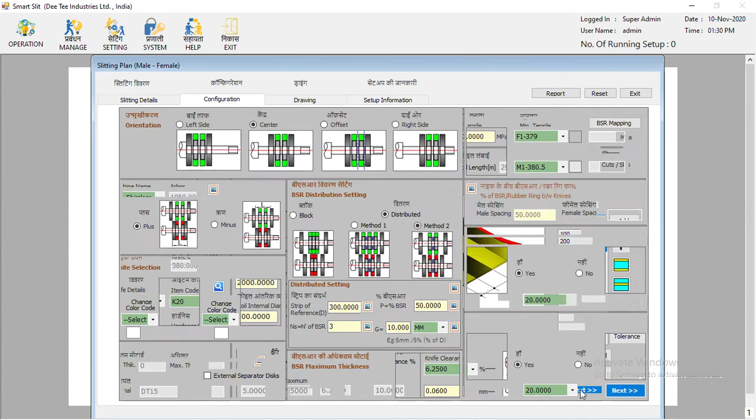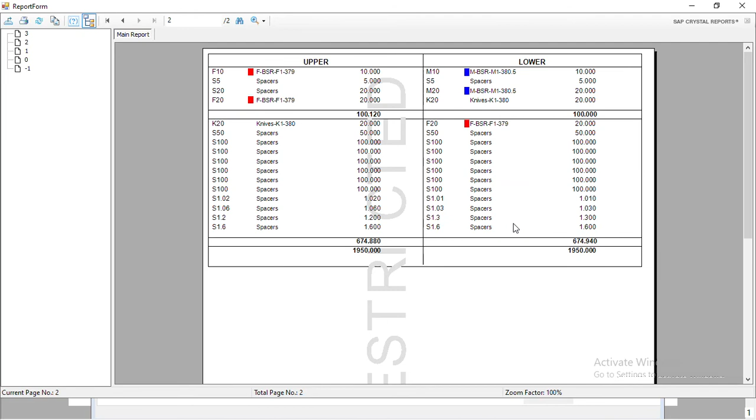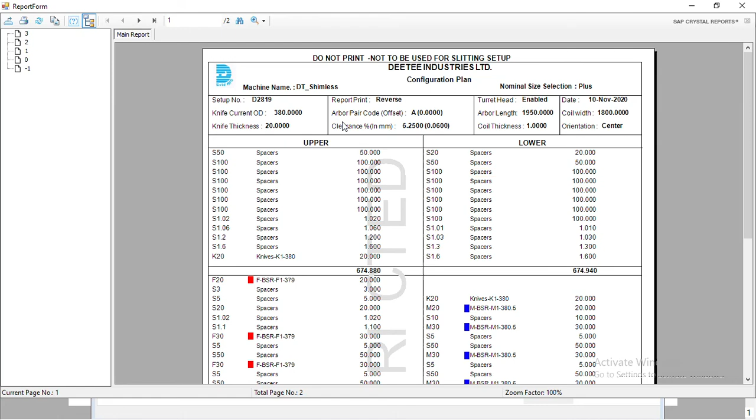So in the software, in the machine there is an option called turret head. If I switch on this option, my report printout will get reversed. Like if it is 100, 200, 300 - if I take a printout, it is showing 100, 200, 300 because that's the order on the arbor. But when I take a printout with this option, the report gets reversed, and it shows first slitting is 300, second is 200, then 100. It does the reverse of the printout automatically, so the operator doesn't need to think about anything. If the unit is turret head type, we enable this setting, and the printout will always be in reverse order. That's also one important function.

I'll also tell you one more important function of this software - BSR mapping. What is BSR mapping? There are two ways. Why I'm talking about BSR mapping is because in the inventory for this particular machine, we have rubber bonded spacers of 3 sizes. This red color is 379, 378 is green color, and 377 is yellow color.

So what was happening here - if I select 1mm and do next, it uses the red and blue combination, although green is also available and yellow is also available. If I select, for example, 5mm, it selects green automatically. And let's say I want to use 9mm - it's using yellow. So now the selection is based on this coil thickness, and this selection of the rubber bonded spacer is done automatically by the software.

And it does this based on two variables - actually there are three variables at this current moment. One is the coil thickness, second is the current knife diameter, and third is the actual rubber bonded spacer diameter. So based on these 3 points, the software is calculating.

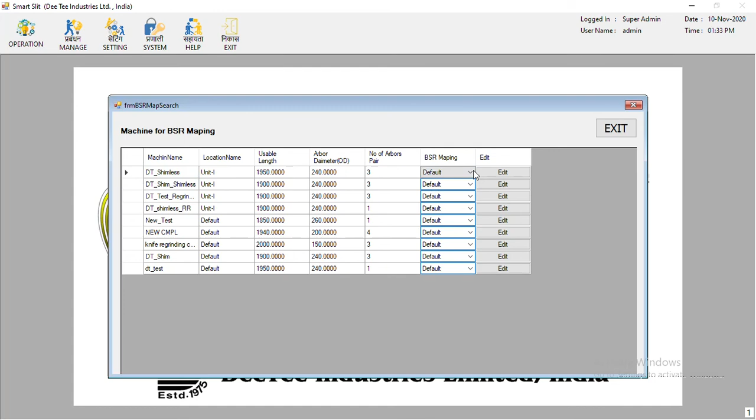I select 3mm, and I select this rubberized spacer as the combination.

I select this customize; also will be doing it on some basis. Okay, so this I have done, I have saved. So 0 to 3 mm I will be using red and blue, 3.1 to 6 I will be using green and blue, 6.1 to 9 I will be using yellow and blue.

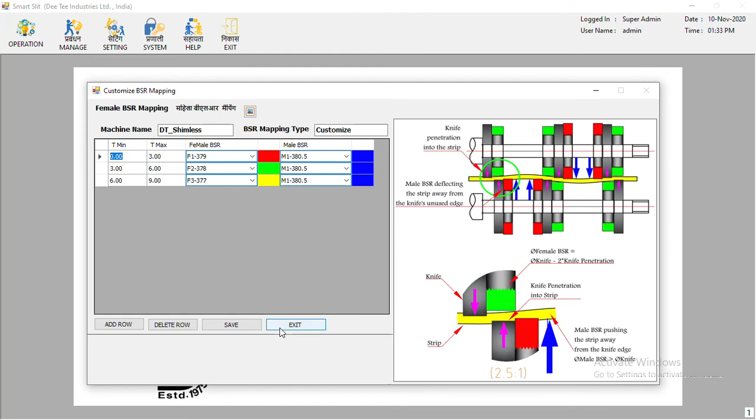So if you can see it here, I am using 1 mm. It should use red and blue. If I am 3, again it will be red and blue. 3.1, it is green and blue. Up to 6 mm we have done, so 6 mm it would be green and blue. So 6.1 it will be yellow.

Above 9, what will it do? Up to 9 we have done, so let's enter 9.5, which is not mapped. It is not selecting anything because I have not planned beyond 9 mm in the BSR mapping. 9.5 is beyond that range, so it is not selecting anything. However, if it is available and I want to use it, I can use it.

So that way we can have different flexibilities. This has various flexibilities of doing this. It is a very good, important function. Again, this function is not available with any of the competitor software.

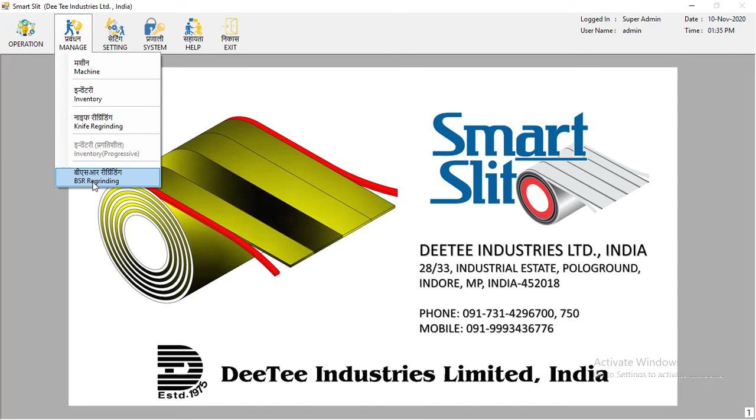Again, very broadly we have covered only shimless. There are plenty of other machines like shims. I can do shims, I can do shims with rubber ring. Let me show some regrinding also. In manage there is a knife regrinding function, so we can open this.

So this is showing a sort of history card, and I can take a printout of it. It tells me how many knives are there, how many have been discarded, any remarks added, when we have done the regrinding, what was the actual diameter, what is the post grinding diameter, and how much material we have removed from the knife.

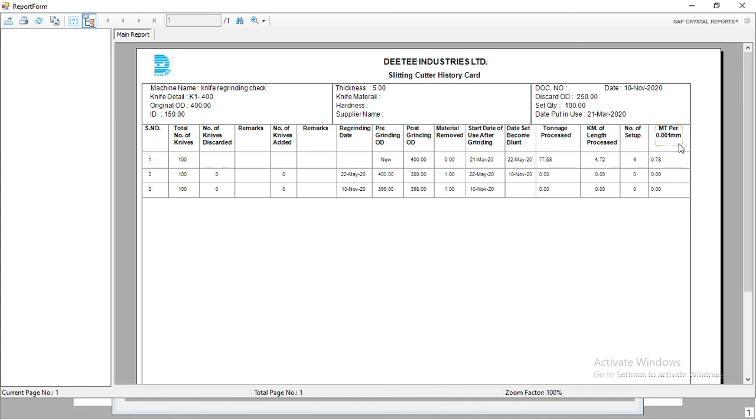And tonnage: since I have input random figures, tonnage is showing 0, but whatever tonnage the user has actually done, that also shows here. So it gives a very consolidated report in terms of tonnage, number of kilometers produced, number of setups produced, and what metric ton per 0.001 mm of knife grinding you are achieving. So it generates a slitting cutter history card.

So again there are endless possibilities with this software. I cannot cover all the points here, but we will be providing you the presentation copy of this session and also the video link of this session, that you can always go through. We are giving online support for this software. We give free presentations to the customers.

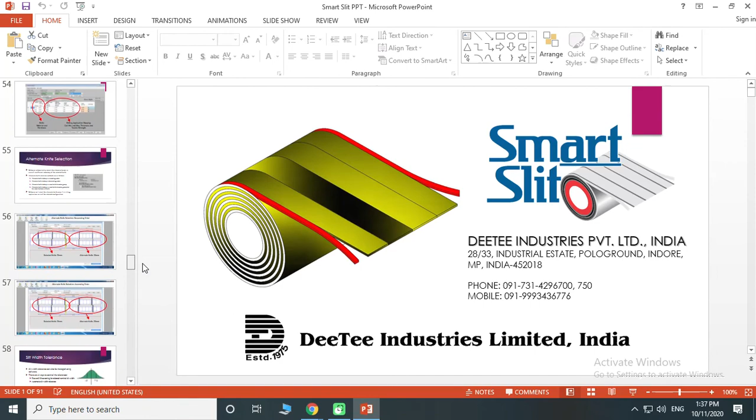For agents, we can give installation also. If they want to show the software to the end user, we can install this software on their systems or laptops, which they can use for showing the software. But for showing the software, they need to actually use it. So I personally think this particular presentation is very useful; it covers all the screens in the software with all the elaborations, so it is very comprehensive. That will also help the customer.

And if the customer is interested, we can always give an online presentation of the actual software with their team, so they can ask their actual questions about how the software will deal with them. If the software requires any modification, since we are the developer, we have the flexibility in changing the architecture, because we have done so much R&D of the competitor software before presenting this software to the market. Plenty of things we have incorporated, plenty we have enhanced.

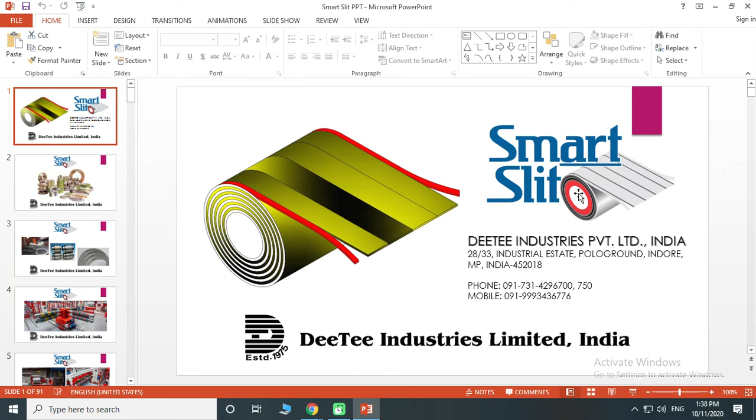And this particular software works on metric and inches. I don't think any software is available for inches; for metric, most of the softwares are available. So again, there are endless possibilities, but you will be able to focus on these things while talking to your user, and this will give you the idea. These two slides are very important, and their explanation is given in the presentation on later slides.

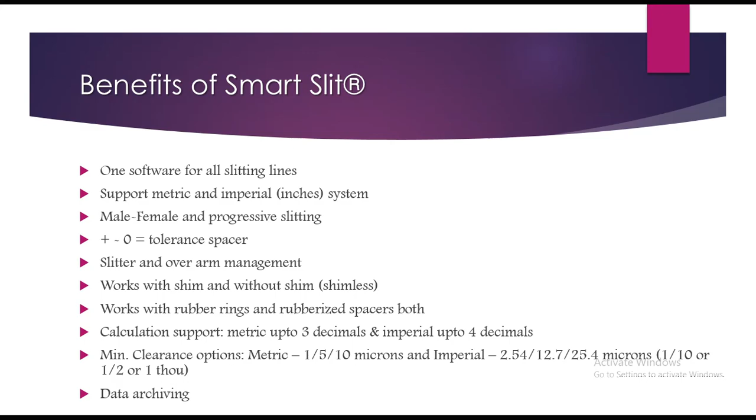So if customers have certain questions, we have a brochure also in this particular software, plenty of news views and other things we have also incorporated. In this license also, it gives the user information on how many days are left for the license to expire, how many machines they can use, how many users they can use, what is the start date, what is the license key. All these things are given to the users.

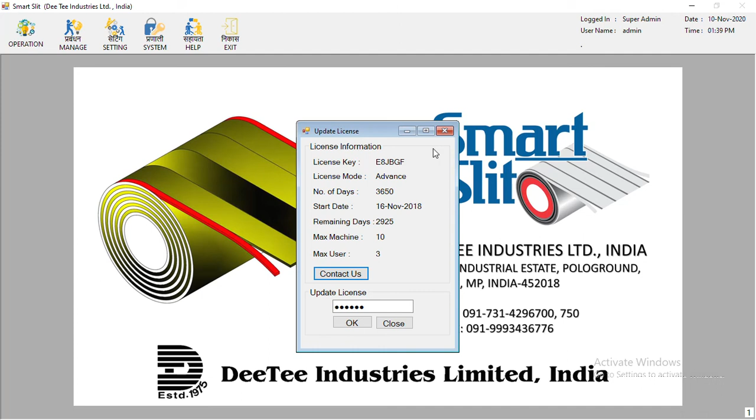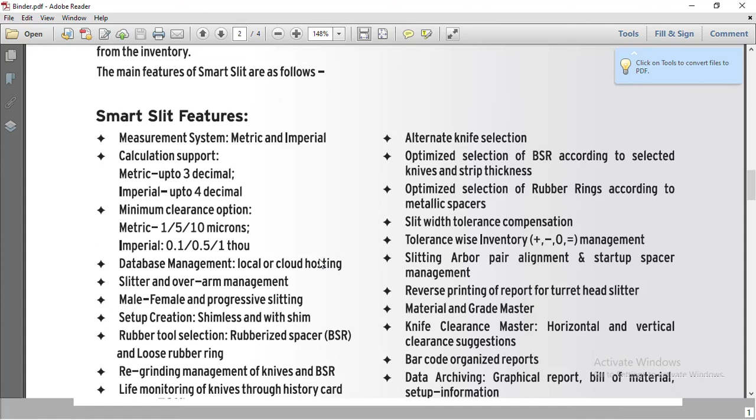There is one technical presentation, this presentation I am giving you, that is also there in the software. So this also gives you an idea. The user brochure for the software is also there. This is the brochure for the software. So I think this brochure is with you, explaining all these things.

Again, for example, slitting arbor pair alignment, startup spacer management, these things I'm not able to cover in 2 hours. So there are plenty of things which make our software far better than the competitor software, on a better platform, because in other software all the functions are not in a single package. It is just unparalleled, this software.

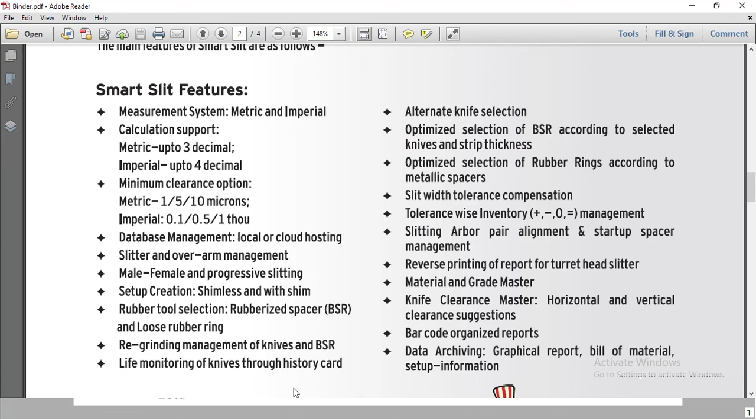Actually, this may be a very heavy session, being a very technical one. But the beauty of the software is that it's very user-friendly, and can be used from bottom to top with a lot of flexibility. You can control your inventory, you can monitor your inventory, you can have a history of your cutters, grinding patterns, and this program can handle metric as well as inch dimensions simultaneously. If you want to order inch tooling, it can handle inches also. If you order metric tooling, it can handle that also.

Another beauty of the software is that it can be installed from India. We can give online training, we can give online installation, and it is a licensed version. So if somebody wants to use our software, we can give a free trial for 2 months, so that they can do all their day-to-day activity on this software and have confidence. And a special training session can be organized from here. So this software has very unique features in all respects.